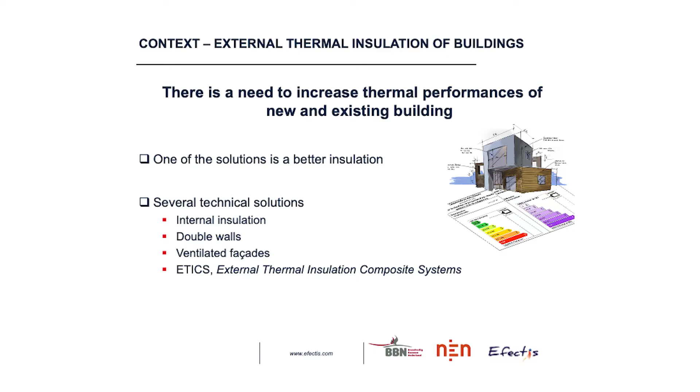So all these elements are facing rapid change in the energy problematic, as we saw recently. And so the projects where we will have positive energy or refurbishment of existing buildings will be more and more important. So there's a need to improve the thermal performances of new but also of existing buildings. And in existing buildings, one of the better solutions is better insulation. In new buildings, it's sometimes easier to implement, but in existing buildings, it's not evident.

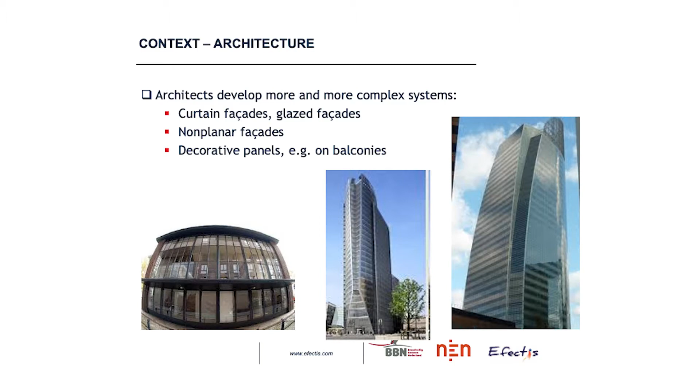And we have several technical solutions. We can use internal insulation, but we have thermal bridges. We can use double walls, ventilated facade, ETICS. We have plenty of other solutions. And not only, because we are also facing, I saw there were some architects in the room, I will say we are facing the architects. It's not a critique. It's just saying that the buildings are also more and more complex in terms of shape.

It's not just a rectangular shape with masonry; we don't build today as we built in the 60s and 70s. So we have curves, we have extensions, and all these are very important in terms of constraints to the facade. We will see later, but we have, for example, decorative panels on the facade that have nothing to do with any function except aesthetic. And they may matter in terms of fire safety sometimes. And sometimes the regulator forgot them because in his mind they didn't exist.

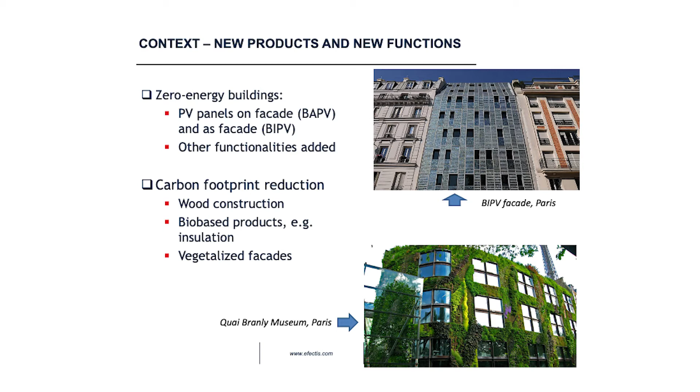We see also that we have more and more new products and new functions. So I saw these pictures before. I was laughing because it's a building in Paris.

But it's a typical example of what we see today: we add functionalities to the building. We had, for example, solar panels. Here it's a full facade full of PV panels, but it could also be integrated panels. And so this is a new challenge.

What is the definition of a facade when you have no masonry? The facade could be considered with the fire from the inside to the outside, but also from the outside to the inside. You have cavities in it, you have functionality like photovoltaics in it. So even the definition of the facade is challenging. So we have to focus on that.

We have to think about what the systems are, and if we change the regulation, is it adapted to future systems? This is why performance-based approaches and performance criteria are very important to define. If you don't have a clear objective and you just refer to a level of performance, a fire class, and so on, it's not enough, because you perhaps miss a large part of the parameters.

There's also another important point, which is the carbon footprint. It's a political decision. You can be against having wood buildings everywhere and so on, but it's where society will go. We have to be adapted to that. We will have bio-sourced insulants. We will have bio-based structures or mixed structures with concrete and steel. So we have to consider that.

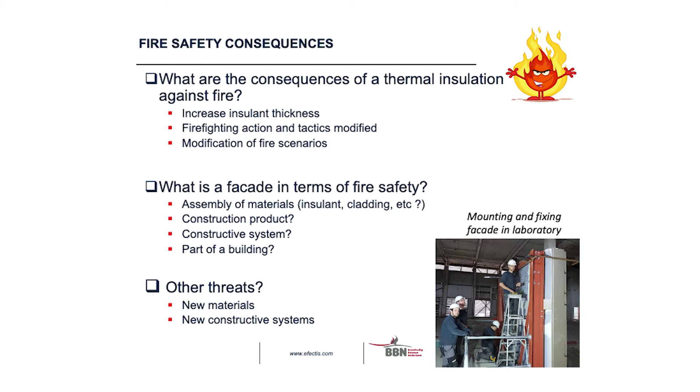So far we haven't dealt with fire, so let's go to fire. What are the fire safety issues with that? If we increase the thermal insulation, we increase the insulant thickness, for example. So we increase the quantity of potential fuel on the facade compared to the systems we saw before the year 2000. We had a large increase in insulant thickness; when I say large, it's sometimes 3-4 times more.

So it's really important. Firefighting action and tactics are also modified by all of that, and it also modifies the fire scenario. Thermal insulation doesn't mean only the insulant, it's the whole system. So we have to think about the constructive system, all layers, from the inside to the outside.

So what is a facade in terms of safety? It's really not evident. Is it an assembly of materials, an insulant plus a cladding plus an air gap plus masonry or other things behind? Is it a construction product in the sense of the European Construction Products Regulation? Is it a constructive system, and what is a constructive system? Or is it a part of the building? Honestly, we have no answer, because each country could take a different approach on that point.

For example, take the case of the UK, you will see later: they decided it's more a construction product, like for the CPR, something that is circulating, so they make an assessment at product level. In France, we consider it more a part of the building, so we have compliance building by building. So the approach can be different. For us it's the last category: it's covered by the regulation in terms of conformity of the building, not conformity of the components of the building.

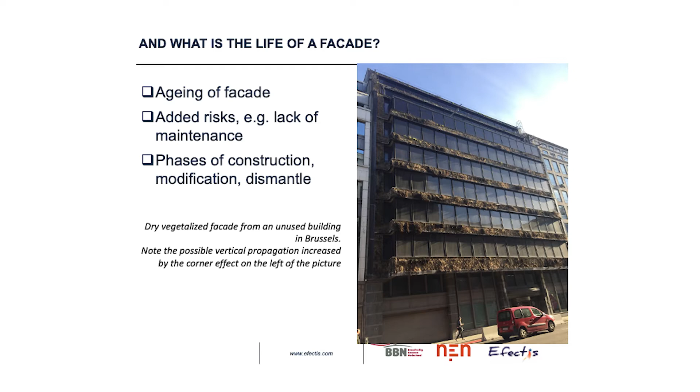Recently, you had a very large wood building that burned in the middle of London. I don't know if you saw these pictures. It was really impressive, and firefighters could not approach because of the radiation of such kind of fire. So they were close to losing several buildings at the same time because of this phase of construction.

And dismantling is also important, because nowadays we have to consider in the life cycle of our buildings the dismantling phase that will also create a risk, and what we do with the materials in the end. Fire could be a way to incinerate them quickly, but there's another issue, which is a regulation issue.

We regulate for products, we regulate for buildings, and in the middle there's a facade. It's not a product, it's not a building, it's a part of a product, it's a part of a building. So depending on the angle you take, you could be in the middle. If you take, for example, kits, they could be included as CPR products, and so this is CE marked, and this is really followed as a product.

But if you take, for example, curtain facades on high-rise buildings, it's really a national building code, nationally regulated. We will have different solutions and different requirements in each country. We could add fire resistance requirements and so on, for example. So this is very important because your assessment could be done at the two levels. And some countries, as I mentioned, choose one or the other. But the reality is probably in between. It's a gray zone.

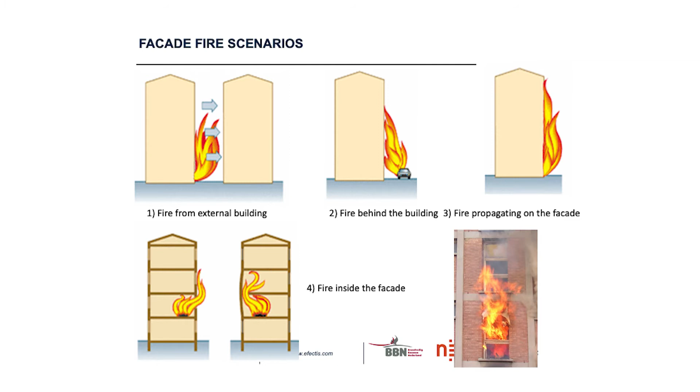What are the reference scenarios for facades? We have to focus on the different fire scenarios that we face. We could have fire from an external building radiating to another one. We could have fire behind the building, fire propagating on the facade. I just listed some of them, but we could have many. The last ones are important because they show you that it's not only a question of the material that is present, but also of the constructive system. For example, in some constructive systems, the connection between the facade and the slab is of great importance for the fire propagation. In others, it's less sensitive, but if you have performance requirements, you have to consider all these aspects.

Here, this is just an illustration of a test we made on buildings that were dedicated to destruction, so we could play in it a lot. We made apartment fires and saw what the flame pattern looks like for real fires in apartments. Here in France, we based our strategy in the past largely on horizontal and vertical deflection of flame. And we see that it's not necessarily relevant or not enough, because even if you have a non-combustible facade, it doesn't mean that your fire will not make jumps, leapfrog, we say, from one story to another.

The question is not that it's impossible to have this leapfrog effect, it's just that it has to be compatible with the action of firefighters. Meaning, if you jump from one story to another every 30 minutes, it's supposed to be compatible with the action of firefighters. It's written nowhere except recently in a UK document, PAS 9980, that writes that explicitly.

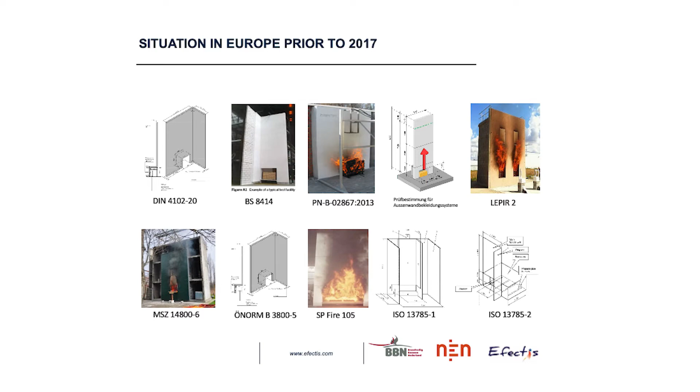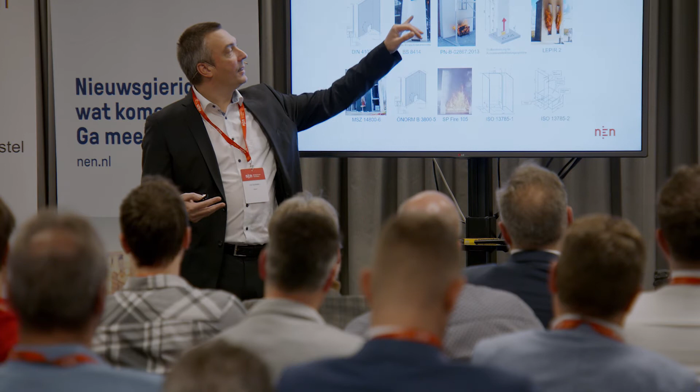are not so similar. If I take, for example, BS 8414 in the UK, they estimated that the worst condition was to have the maximum quantity of fuel on the facade. So they make a fire chamber that is supposed to reproduce a fire inside an apartment. They have a lintel, and then they look at the propagation on a corner with the insulation product. There are two parts, one on masonry and one on other systems.

In France, or in Sweden also, the basic hypothesis is not the same, because we estimated that it was important to have a window on the facade. And why was it important to have a window? It's because we had a lot of systems that we tested that failed because of the details. Especially, for example, polystyrene ETICS, when the window frame is not close enough, or if you don't have the proper barriers, then the fire will enter by the window and the window details, and you will fail the test because of that.

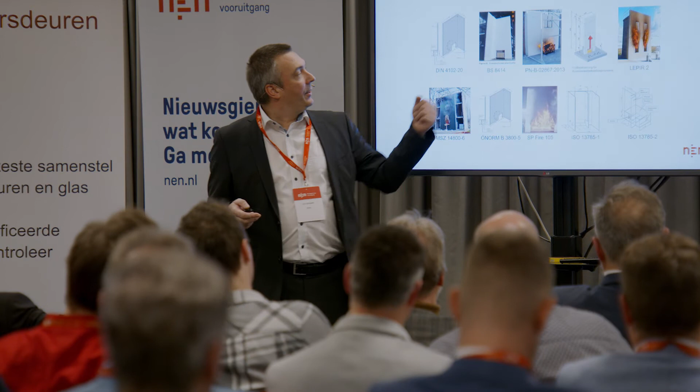So the basic understanding of the objective of the test was not the same. In the UK test, it was only vertical propagation. In the French test, it was a question also of propagation and penetration to the upper compartment. So criteria are also very different. The objective, in fact, is just to assess whether the facade is safe or not, but the understanding of the objectives is not the same.

And it's perhaps because at the time the test was defined, there was a limited number of constructive systems, and it was the right choice for them. But with time, it was not evident that this hypothesis was still valid.

We had also a report, so we are prior to Grenfell, that was done by Fire Safe Europe and presented to FIEP at the end of 2017, so after Grenfell. And we have the same elements with the list of the different requirements for different kinds of buildings between the different European countries. We see at that time Netherlands and Belgium, no requirement. This is in the report, it's not me.

Then the Grenfell tragedy occurred. We heard a lot about the Grenfell tragedy, but in fact the judgment is not done. What we could say is that even such a catastrophic event is a combination of several failures. There was a failure in the choice of materials, but it was compliant with what they asked at the time. There was a failure in fire resistance of the building because fire penetrated to all apartments. There was also a failure in the strategy of letting people stay put in the building instead of evacuating.

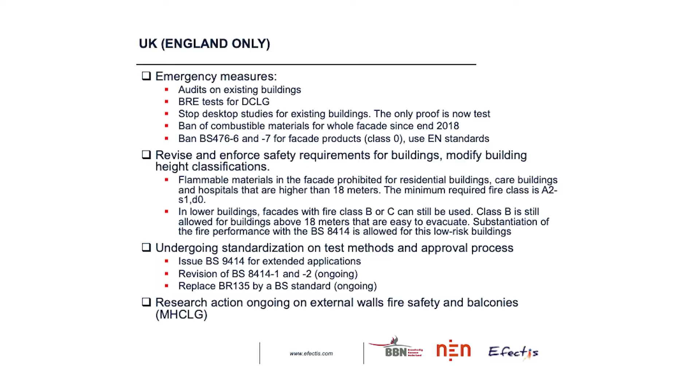In UK, in fact, there's no UK regulations. There's one in England, there's one in Wales, one in Scotland, and one in Northern Ireland. So it's very simple. There are 4 regulations. And for the 4 regulations, they have provisions that are quite common. So just after Grenfell disaster, they made audits on existing buildings. They decided to stop what they called desktop study, which was really desktop, meaning assessment without any experimental data or with weak experimental data. And they banned such kind of practice.

They banned the combustible material of a whole facade, but they saw that it was not practically implementable, and so they changed a little bit the way how to do that. And they banned the former national classification for facade elements and refer to European standards. So it's at the same time as Brexit.

They also revised by the time their different regulations, and in fact, simply they say that if you are more than 18 meters, you have to have a large majority of materials which are A2-s1,d0. And in lower buildings, facades that are classified as B or C could still be allowed. And they have to perform BS 8414 tests.

And they also progressed on issuing a document for extended application, which is BS 9414, which in fact says to you that you have to test everything. It's oversimplified, but I invite you to read that. And they are working on improvement of their different documents. And they also started research programs because they said, okay, we have to have supporting research programs for the future. And there is one for external walls and balconies, which is undergoing and which will be finished in 2 years from now.

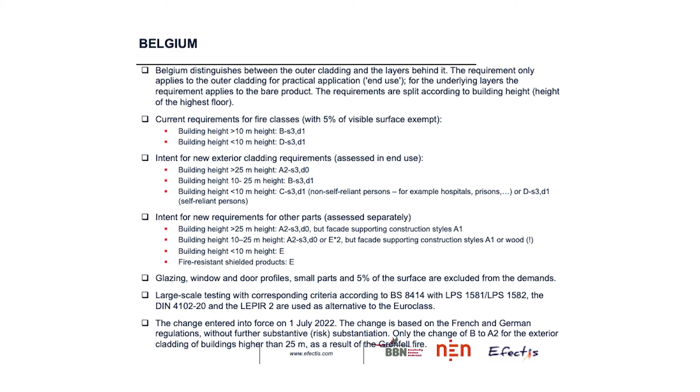So I will not detail all the countries. You will have the slides, I think, so you will have all the details for everybody. Here, this is Belgium, Finland. So I put a lot of different countries, and you will see the criteria are different in terms of height from one country to another. Very often you will see the 28 meters because it's the size of the largest ladder of firefighters. But the limit at 56 meters, 50 meters changes from one country to another. I don't know if you already tried to be at the top of a ladder of 28 meters, but it's interesting.

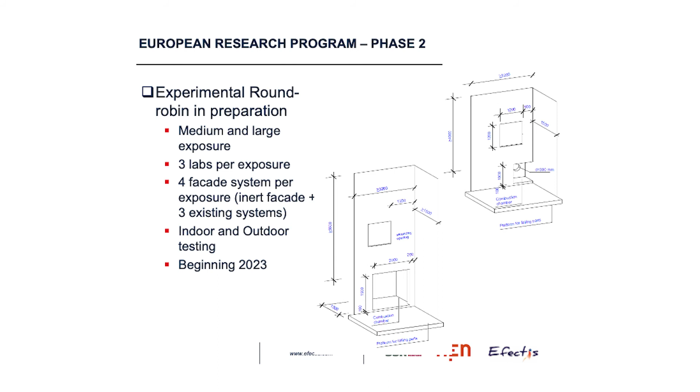The European Research Programme has a phase 2. I mentioned the report previously. Phase 2 is ongoing. We performed a theoretical round robin. We studied the fire sources a lot. We have issued several reports at present. And what it looks like is that there are two sizes of test method, and especially the most important one is the large size.

The large size is similar to BS8414 size, more or less, but with a secondary opening, a dummy window in it, to reproduce the weak points that could be provided by a window frame. And we defined different levels of exposure and a system of classification for that. And we will do an international round robin that will start in the beginning of 2023 to see, for example, if we could do that exclusively indoor, or indoor and outdoor, and what are the limits of the method, notably the criteria of repeatability and reproducibility. So this is the work that is ongoing.

From this work, there's a route to CEN. So this is the view; if I come back in 6 months to present the update, it could be different, but it gives you an idea of the time frame now. It means that we could have a European standard available in about 10 to 15 years. So if you have nothing, do something, because you will have time to use it. And after, you could come back around the table in 15 years and say, okay, now I implement the European test, for example. But the time frame is about that. So it's long.